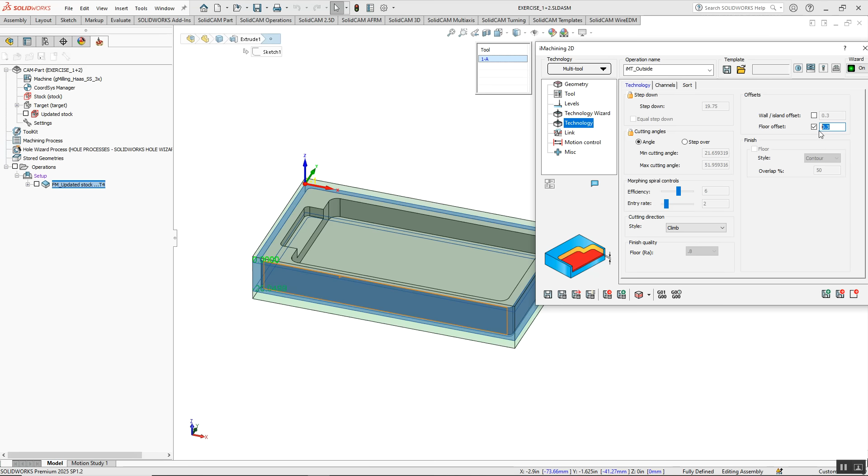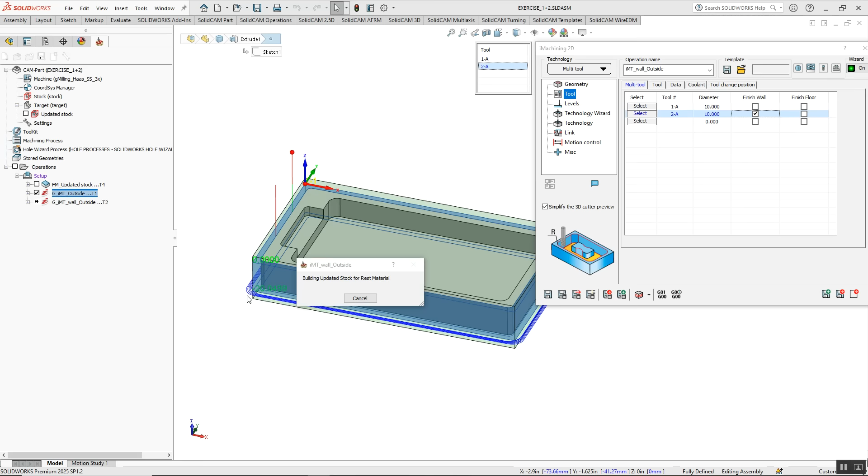Then I'm going to select the finishing tool, which is tool number 2. And to enable finishing of the wall, all we have to do is click the checkbox for finish wall. If we calculate this operation, we're going to first get the roughing toolpath with one tool, and then we are going to get the finishing toolpath with the second tool. So there is the roughing, which is the blue toolpath lines, and then the finishing, which is one finish pass around the wall. Since it's an outside, it doesn't need any preparatory toolpath.

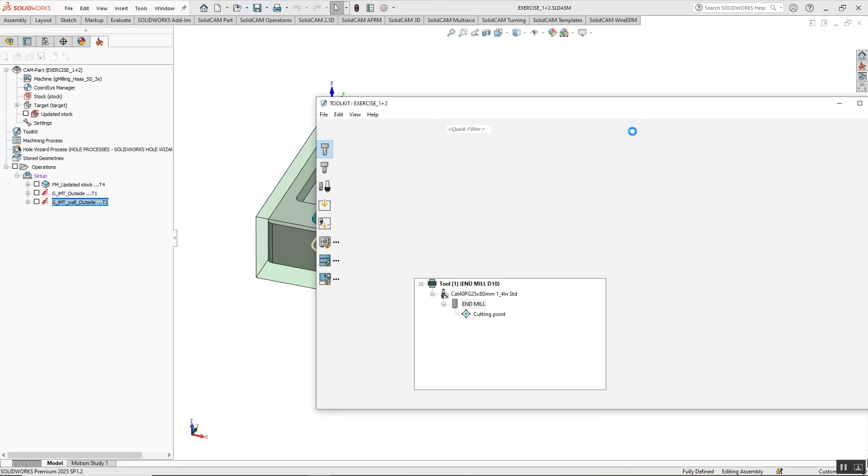Now let's do the same thing for the center pocket here. So once again, add a 2D iMachining operation. This time, instead of choosing outside, we're going to pick the face. We're going to select the same set of tools again. So tool number 1. And then we're going to go pick tool number 2, which is our finishing tool. And since this is an actual pocket, we're going to tell it to finish the wall and the floor. And that's all we have to do.

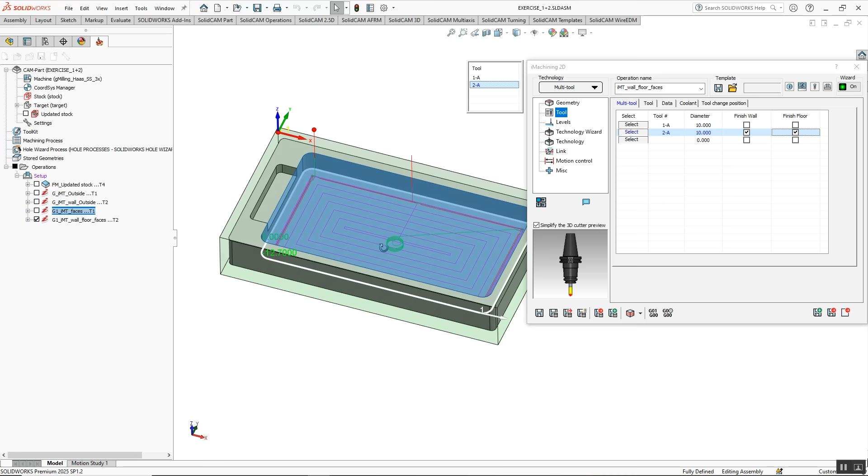We can calculate these two operations. And here we have the roughing. As we can see, it helical enters down into the pocket. So there's the roughing we see there. We see the blue region of what it found to machine. And then this is the finishing of the walls and the floors. And you can see on the finished floor, we're doing a contour style toolpath.

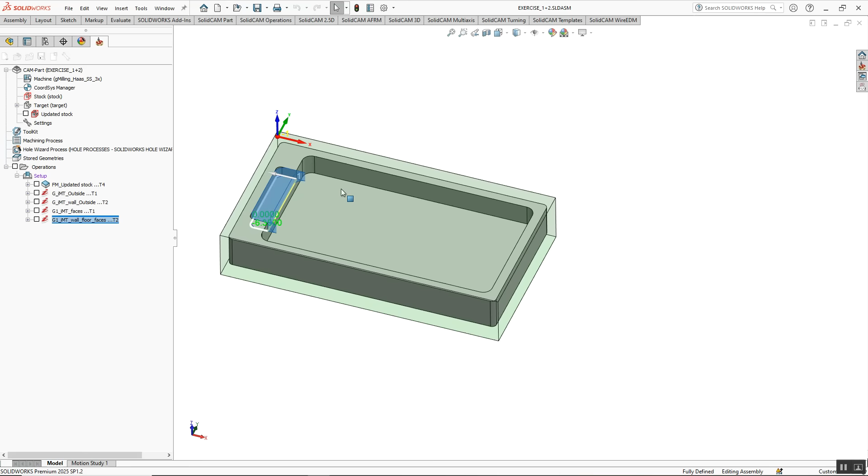And last, what we want to do is do the exact same thing on this semi-open pocket here. So we'll pick our face. We're going to go pick our tools. Now what's nice, when I pick this 10 millimeter tool, you can see in the prismatic region that it shows what it can machine. The tool cannot fit into these corners. So I'm just going to go continue picking.

We'll go pick the finishing tool for the walls and floors, and we're going to say, finish walls and floors with that 10 millimeter. And then last, we just need to follow up with our 4 millimeter tool, which will allow us to finish in just the corners, the walls, and the floors. Let's calculate this operation. So once again, in multi-tool, this is sharing all the same geometry and technology parameters, but you can change feed, speed, step overs, and things like that for each operation in each tool.

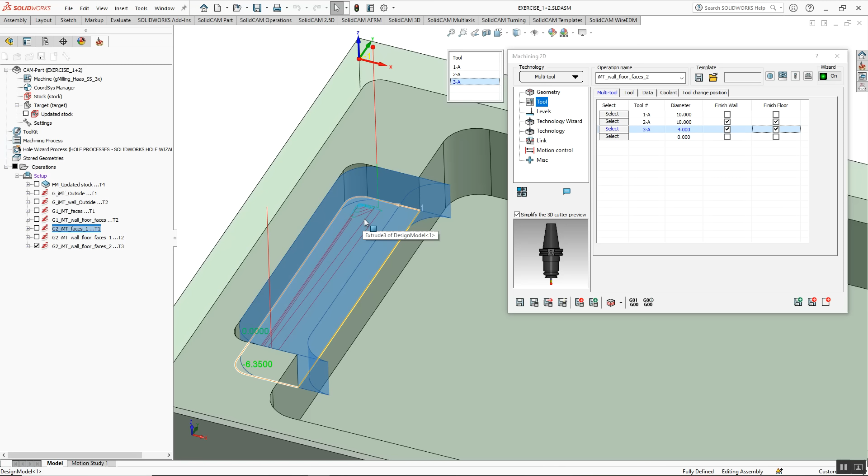So if we look here, we can see we have the roughing toolpath, which is just doing the first roughing. Then we have the finished floor. Since we have a corner that would over-engage the tool when we finish the wall, iMachining does its preparatory work and iFinish to finish out those areas. And then the last toolpath is the rest machining with the 4 millimeter that does the corners.

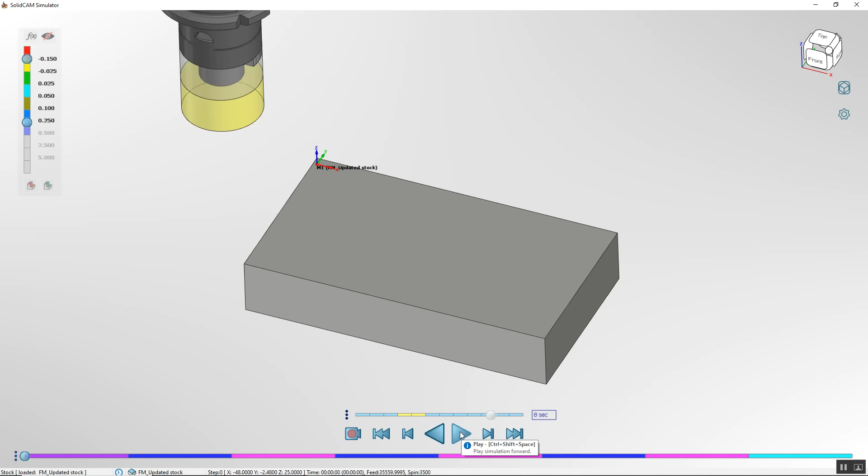Now let's go take a look and see what this looks like in the SolidCAM simulator. We can make this full screen. Now I'm using the SolidCAM simulator in machining time mode, and I've chosen equal playback, and I set each operation's time to be 8 seconds. So now when we play this, we'll get a nice review of each operation, which is listed down in the bottom bar, taking 8 seconds.

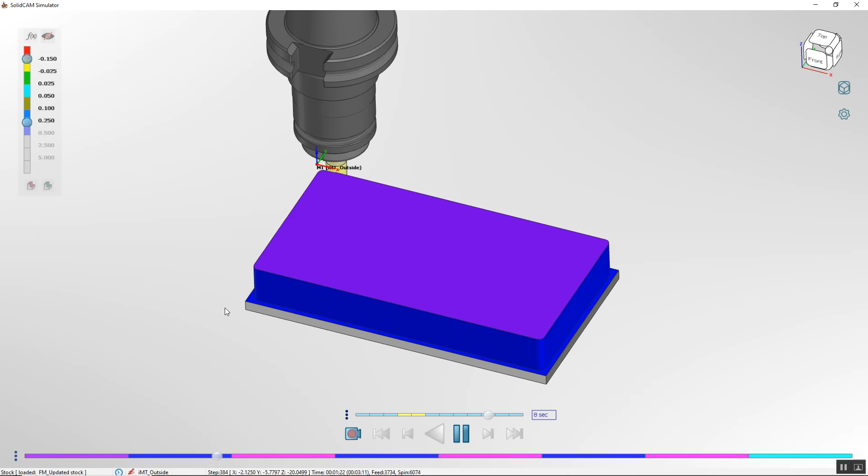So the first thing we have is the face milling toolpath. That is clearing off the top of our part. Then we have the roughing of the outside with the tool number 1, which is the rougher. And then we have the finishing toolpath for the outside wall. Next comes the roughing toolpath for the center pocket. Then we're going to do the finishing of the walls and the floors with tool number 2 for that center pocket.

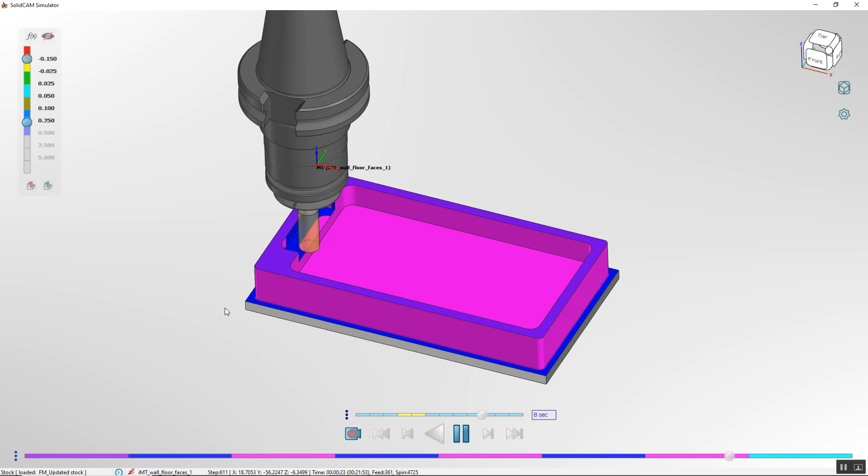And then the last thing we have is the semi-open pocket. And we have the roughing tool roughing. We have the 10mm finishing tool finishing the walls and the floors, but it's not able to get all the way into the corners. So then we come back in with our 4mm tool and finish in just the corners. And that does finishing of the floor and the wall, because as we zoom in here, you can see that there's material it has to clean up on the floor and the wall.

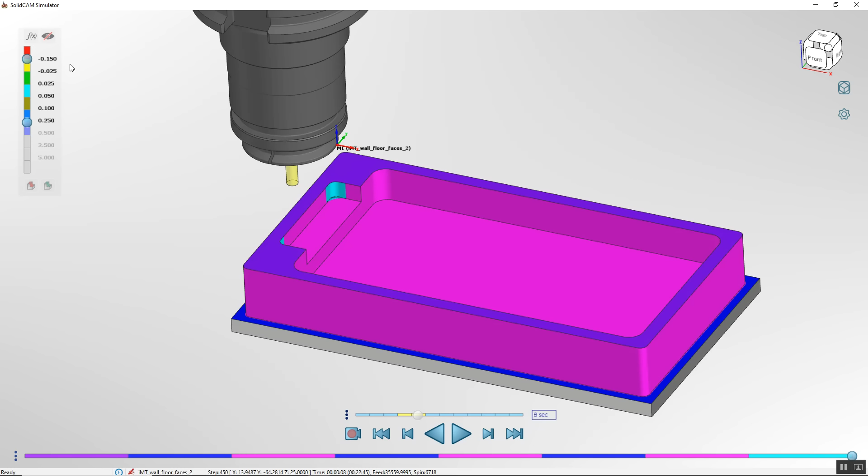And if we just do a quick comparison of stock and target, we can see the part is completely finished, outside of flipping it over and machining the backside. And in the next video, I'll go over optimizations for this part.